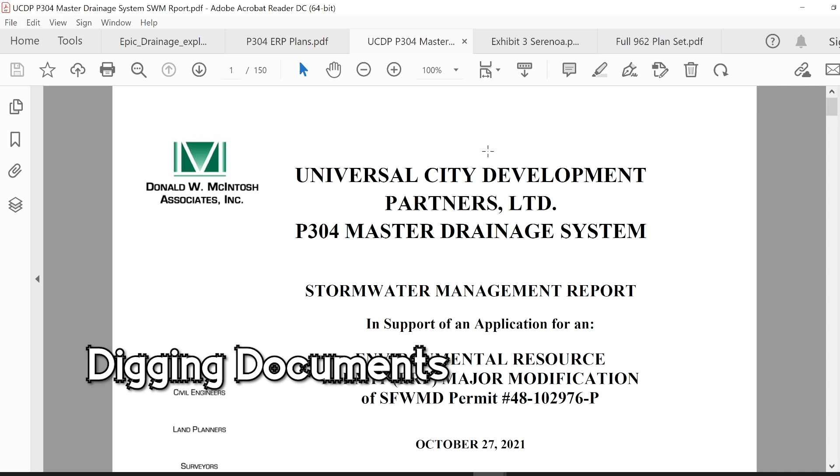My name's Tommy Hawkins and I'm about to talk you through the most exciting world of drainage. I know you're probably thinking it's pretty boring, but actually there's some pretty cool stuff we can find out from

the environmental resource permits. So here's the one for Universal, for Epic Universe. I'm going to show you the outline in a minute on Google Maps, but this talks about the impervious surface ratio of being 0.9 (90%). This is super important when it comes to how Universal have decided what's land and what's ponds and stuff like that. So essentially what it means is they're working on the assumption that they're going to build on their piece

of land 90% of the surface with something that can't soak water in at all - buildings, parking lot, pavement, any solid surfaces. But instead of trying to do it piecemeal, like tiny little bits here, tiny little bits there, they just work out the absolute maximum amount of area that they can build on and what's the absolute minimum amount of permeable surface they're allowed. And then they allocate that to the storage ponds. So they just work to their absolute maximum.

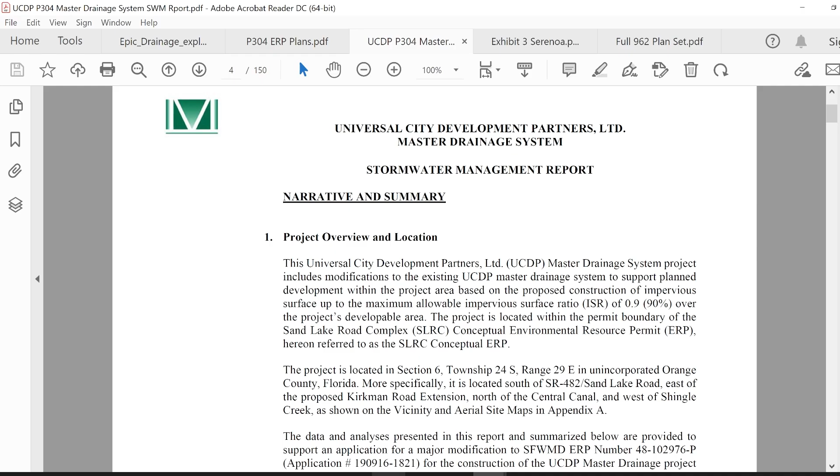So I'm going to show you on Google Maps - Google Earth, I should say - what that looks like. Here's the project site as they consider it. It's 522 acres on their worksheet. Now, as I said, they can build up to 90% of this land. So let's have a quick look what 52 acres of non-impervious surface looks like, i.e. ponds. So quite a big piece of area.

But then when we look at our Google Earth image, you can see that these ponds are spread out throughout the whole site. And there's ponds going to be in places where you wouldn't necessarily think that they need to put one. So I'll go over that.

There is one further pond that you'll see on a lot of these drawings. I'm just going to show you it here. This L-shaped pond, this is the FDOT pond, the Florida Department of Transportation. For a long time I was wondering what on earth this pond was doing there. It was just sitting there. It wasn't part of the plot.

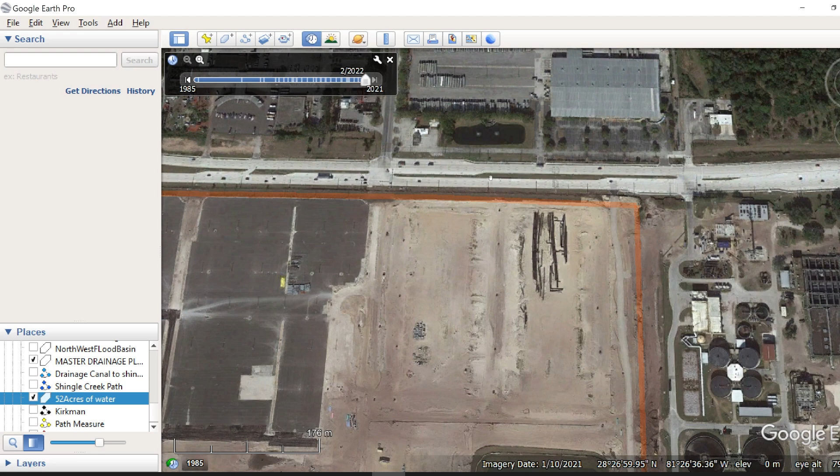It turns out that this is Sand Lake Road running along the top here, east-west. It's actually the drainage pond for that. So if they get any crazy amounts of water, there's obviously an underground pipe. It drains straight into this L shape just here.

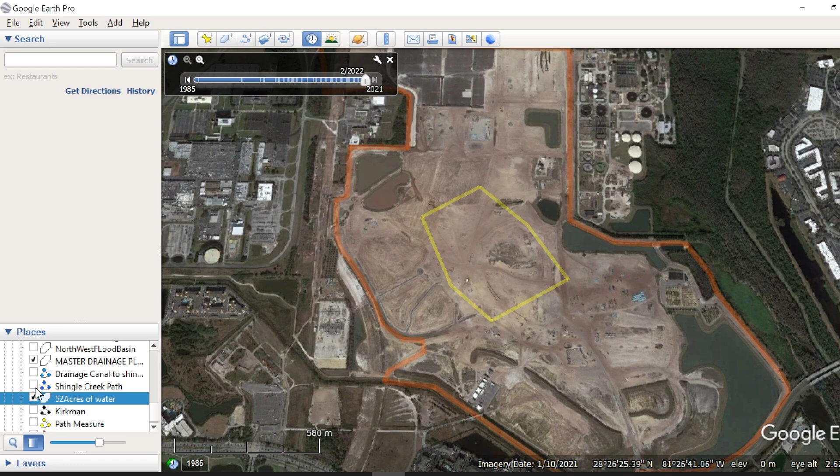There's a couple of main drainage basins that are in the area, or there's a few down here, which I'll get into later on the drawings. The two massive ones are the Southeast Basin, this huge one here. It's got its funny little cutout bit there. Goes all the way down, and then you can kind of see the two other areas that I'm going to talk about in a moment in this little section here, but I'll come back to them later.

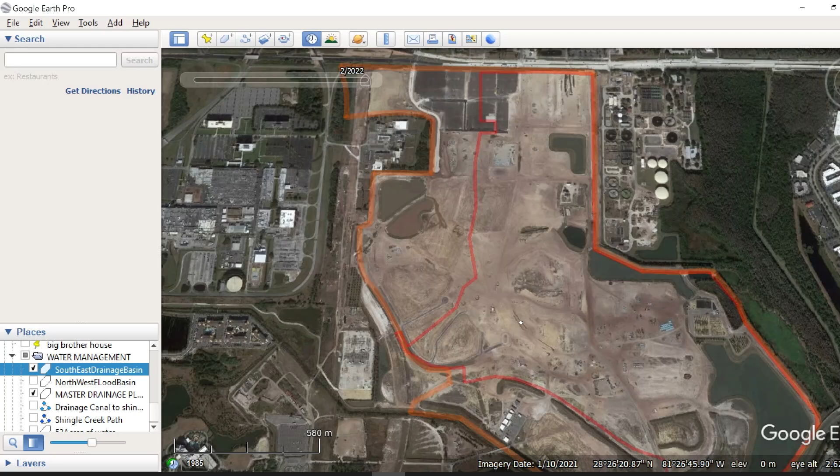And then we've also got the Northwest Basin, which obviously covers back of house, it covers monsters, it covers weirdly half of Potter and the hotel. So that's got its own little area there, and all of that stuff will drain into this massive one here, which is Lake 4. So let's have another look at the document, see if there's anything else to talk about.

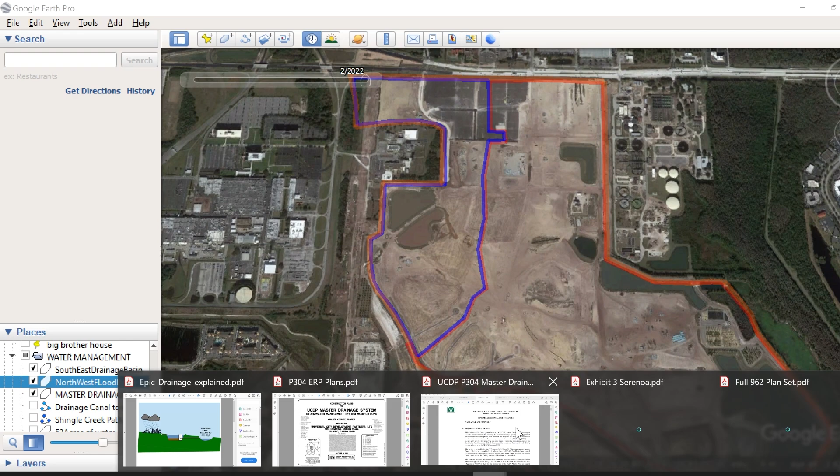Okay, this is important. The design criteria. The proposed stormwater management system must limit the post-development peak discharge rates into the Central Canal and Wetland Creation Area 1 to those established in the SLRC Conceptual Environmental Resource Permit for the 25-year, 24-hour design storm event.

Essentially, if they get a 25-year storm, and I'll tell you now that a 25-year storm means that they're getting, in a 24-hour period, 8.6 inches of rain. So that's a lot of rain. Their design that they've built must slow down that water going into the Central Canal.

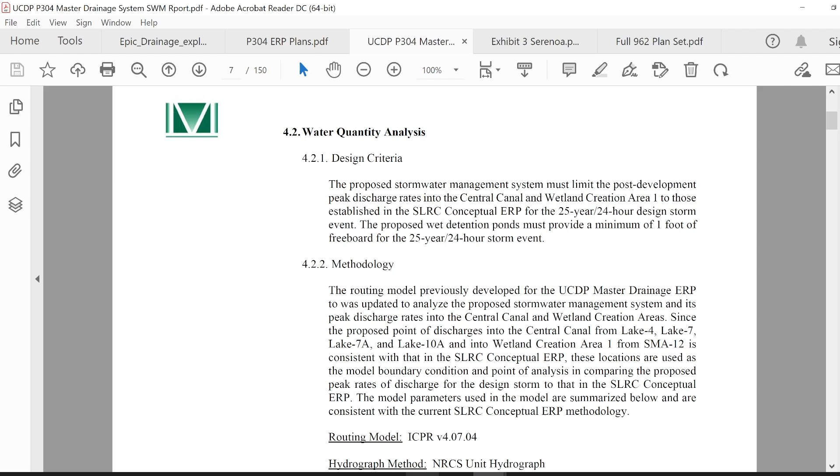So let me show you what we talk about when we talk about the Central Canal. So first of all, here's Shingle Creek.

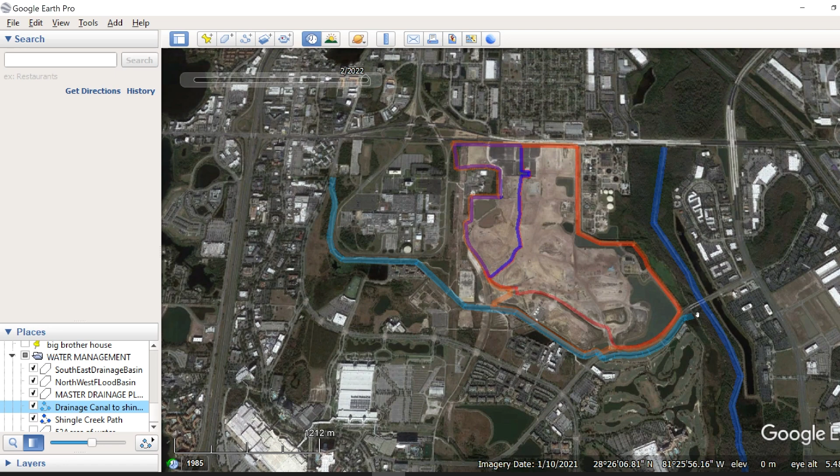That's the main waterway where all the water drains to. If I zoom out a little bit more, we can see this Central Canal. So all of these areas here are going to feed into this central canal and drain into it, and this gets to here.

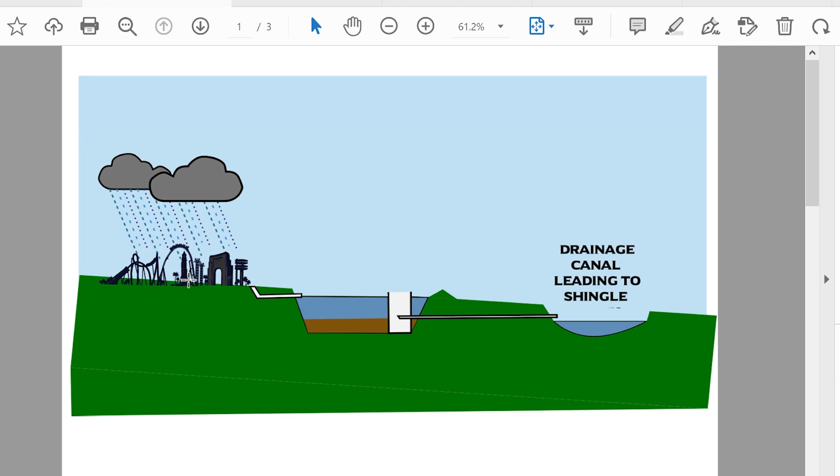So here's the basic concept. It rains on the theme park, the water drains off all the buildings and roofs, drains on all the pathways, and goes into one of our retention ponds. By virtue of all the heavy stuff sinking to the bottom, the sediment settles, and they've got an overflow like you'd have in your sink at home. When the water gets to a certain level, it overflows into this. There are skimmers and traps on top, so relatively clean water goes in, and then it drains out into the drainage canal.

So you're probably thinking, okay, there's not much increase between the design height of what it can take in terms of water and the regular water height. But obviously these lakes are pretty big, several acres, and we'll start seeing in these calculations a measurement of water volume in acre-feet, which is 1 acre of land at 1 foot deep. So there's obviously considerable volumes of water there.

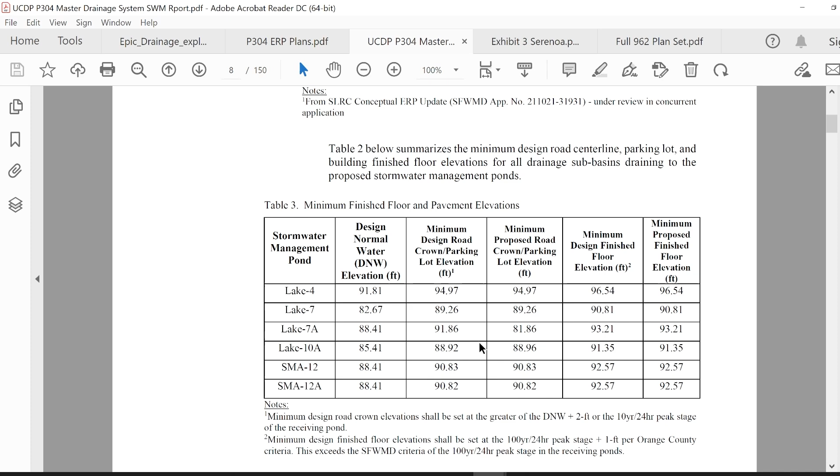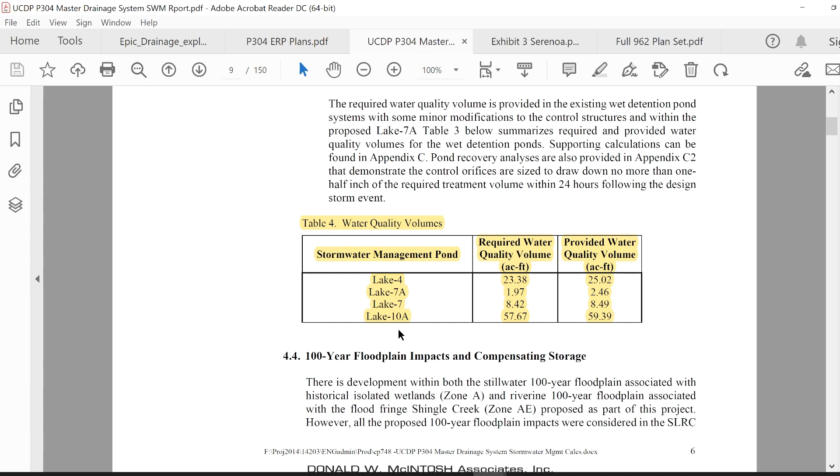As I just discussed, the required water volume they need is 23 acre-feet, and they're providing 25 in their design. One acre-foot is 1.2 million litres of water - that's quite a bit, you can see there's quite a bit there. 10A, the biggest one, has got capacity for 59 acre-feet, so serious amounts of water there.

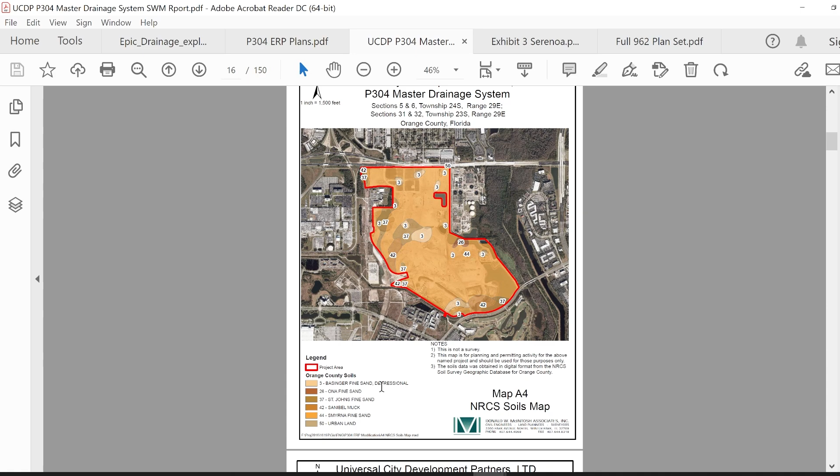This one's for all those sand geeks out there. Here's your different areas with your different grades and types of sand and muck and dirt.

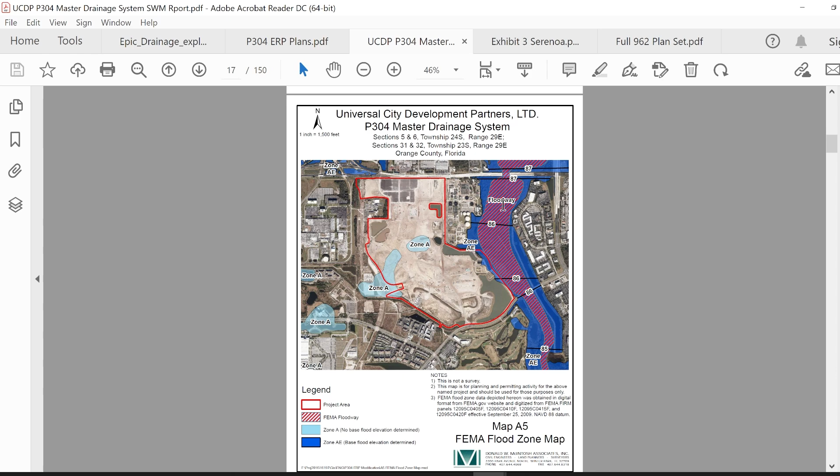This is the FEMA floodway. So if there was a major flood, it would flood out of Shingle Creek and creep into part of the Epic site, but it wouldn't actually affect any of this. So even though Universal owns all this land up here, they're not going to build anything on it. And here's our drainage basins, we'll go into this in more detail.

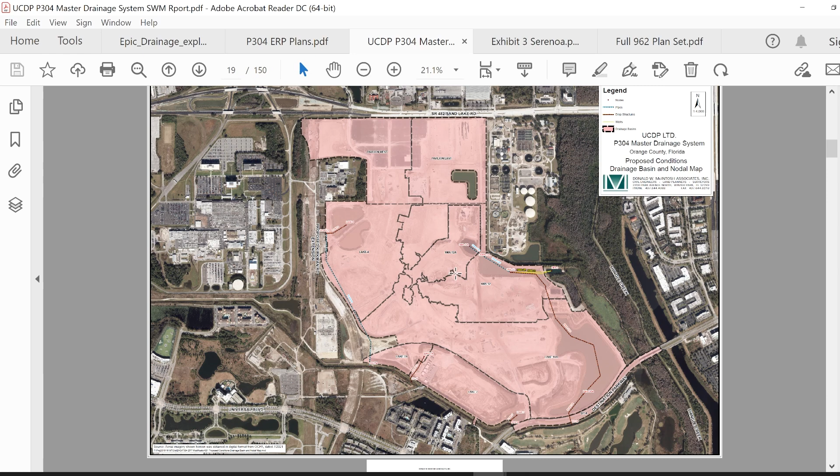You can see the pipeway that takes the water to the canal, and you can see these different areas. So let's have a quick zoom into one of these areas.

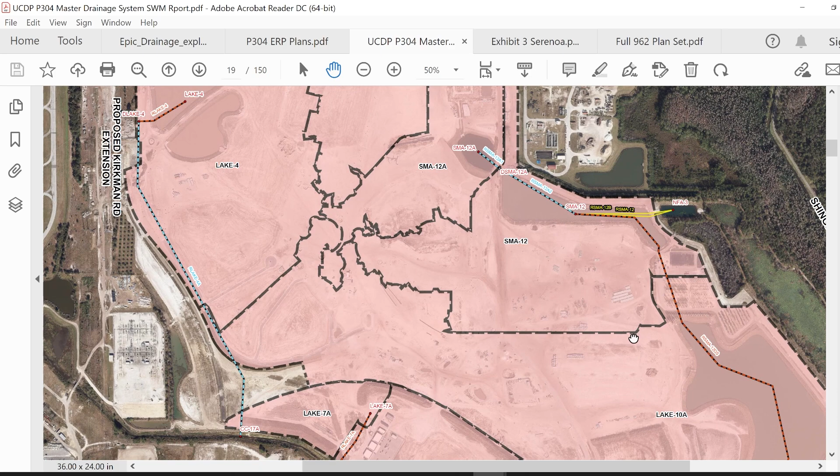Even though we've talked about how it's split into two major parts, we've got these little subsections that are going to drain into the various areas eventually. So it seems this area will drain into SMA-12A, this area will tend to drain into SMA-12, and the larger area will drain into 10A. I'll discuss this further in a moment, but you can see these lakes are connected.

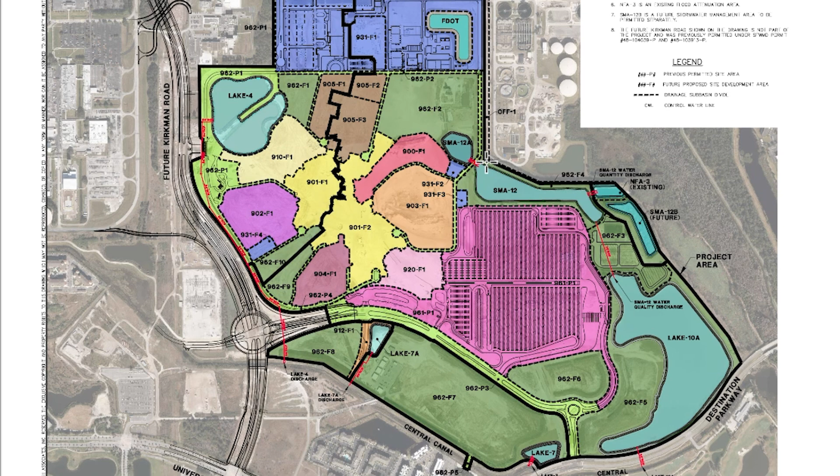So let's go back to our drainage explanation. One theory I believe may be that they are slowing the water down through a series of different lakes, not just one. We can see on this big map that these lakes are all connected. It could be that by having successive drains with those drainage overflow filters, they'll not only clean the water as they go, but significantly slow it down if there was some sort of storm.

Here's the big mega map, we've seen this one before - it's Alicia's favourite, and honestly one of my favourites too. So we've got our different areas, we've talked about this one and this one. Let's look at Lake 4 as an example - we can see all of that area drains into Lake 4.

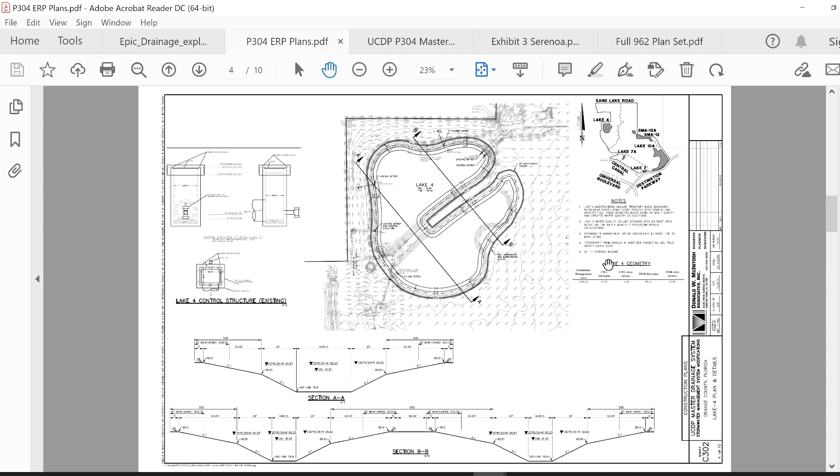If we look at a cutaway of what the lake looks like, we can see that here. Let's zoom in - here's our overflow system that I was talking about. You've got a grate on top, the skimmer, and then the water flows in and drains out. The elevation at the bottom of the skimming level is 93. We'll look at the control level in a moment, but it's got to rise 1.5 feet before it goes over.

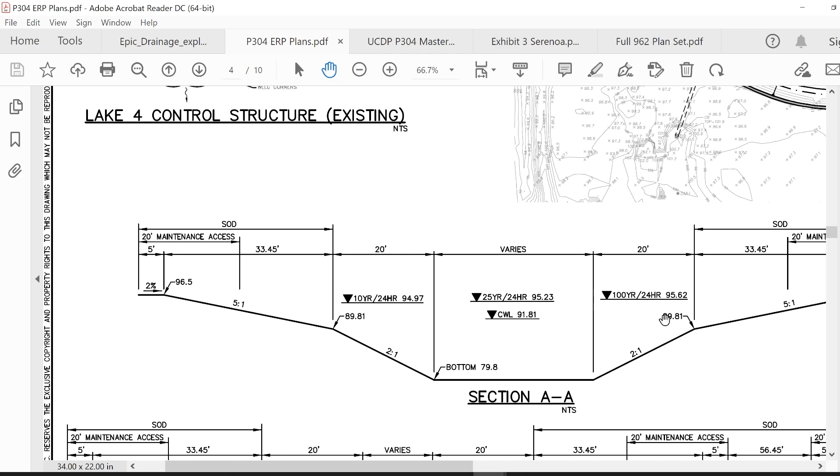The control water level is 91 feet. The 25-year storm is 95, the 10-year storm is 94, and the 100-year storm is 95.62 feet. Most of the time, the water level is going to stay well below the top of the overflow.

So we've got this permit that zooms in really close. A couple of things I want to show you. Here's our outward drain, there's two here. Here's the one we were just looking at. Want to see something interesting?

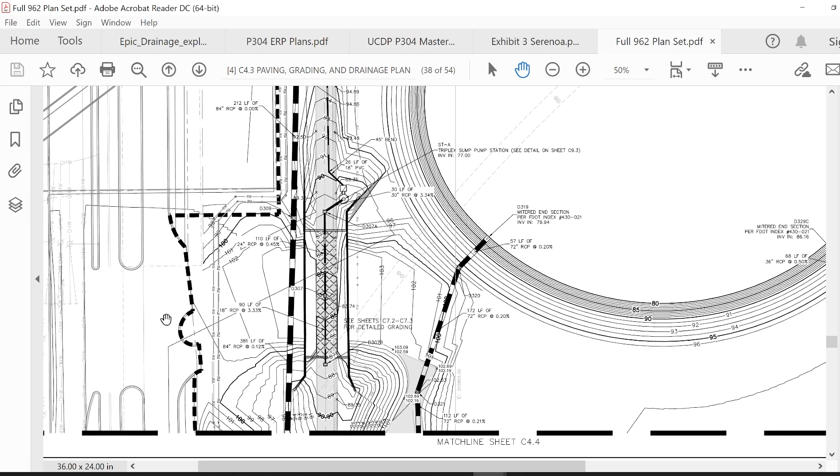Look here, here's our ring road around the site. This is a tunnel. So what that means is the TMs and whoever's using the road can go about their daily business, and the people coming to the hotel through this way won't be affected. They never shall the two mix.

Go back to the rest of it. Okay, so we've got these little ones here. So this one's got its own pond, Lake 7A. We don't currently know what they're doing with this land. However, that's about 12 acres of land there.

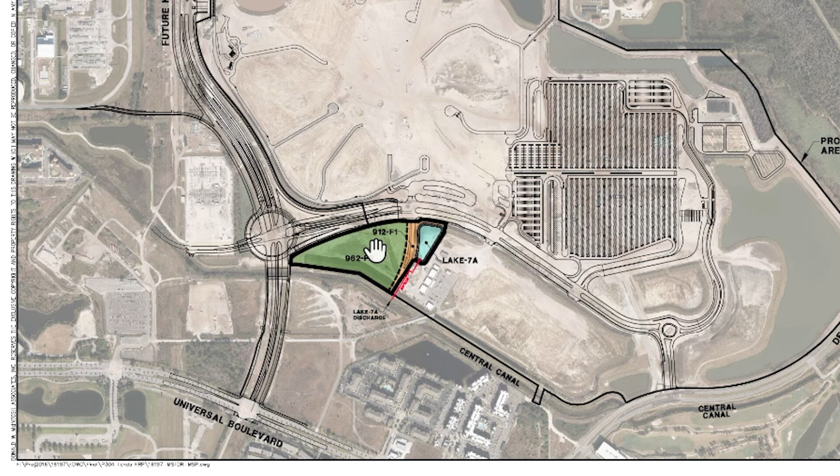So my guess would be that they could put a nice hotel on the corner. I certainly would, but we'll see. We're going to talk about these two plots of land where we've got hotels in a bit. But that's got its own little lake, its own little mini drainage basin there. And again, it's got its own little system with its own little overflow.

This one here, again, we're not sure whether this will be hotel or whether this will be some sort of CityWalk 2.0. You can see here, there's another map and drainage plan that I'll have to try and find, that they're actually building a road on this little section to get across the drainage canal into this plot of land this way.

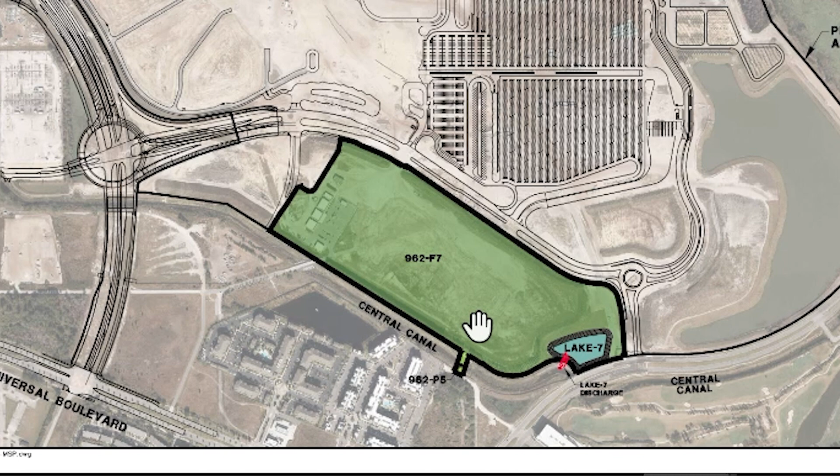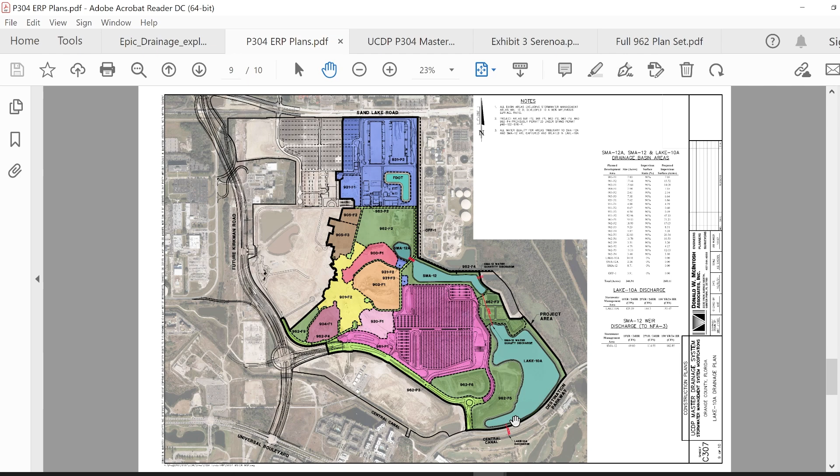That's got its own little lake, little drainage, the same as all the others. Here's our mega one, and we've talked about this, SMA-12, Lake 10A, SMA-12A, and that all drains through and eventually comes out into the drainage canal. So as I said to you, let's look at this a bit more closely.

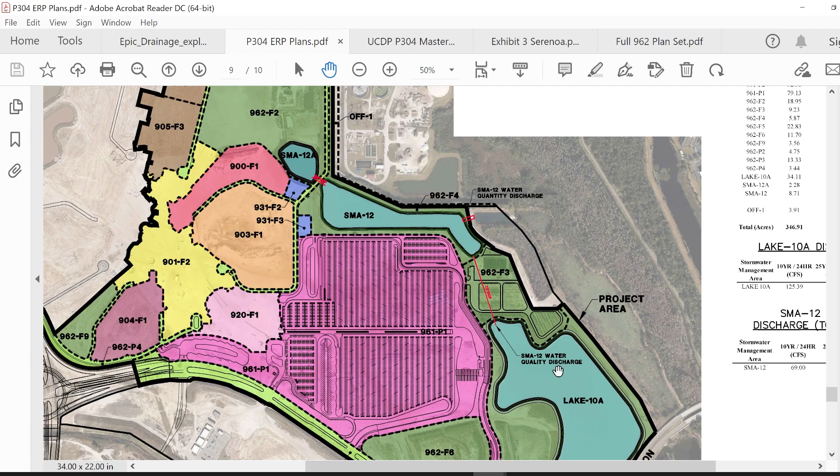They're all connected. Does that mean that one drains to the other, to the other, to the other? I'm not sure, I'd have to probably look at the water levels on each of them. Is one higher than the other, or are they all the same? Is it just a way of moving water around? I'm not too sure. If you know the answer, leave a comment.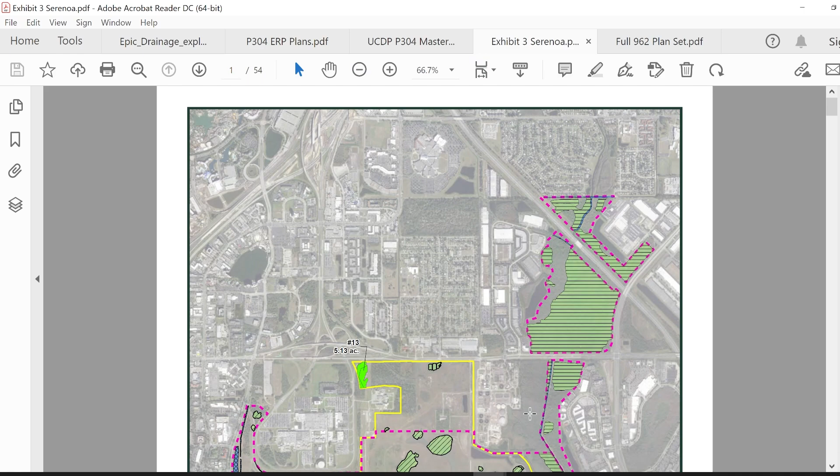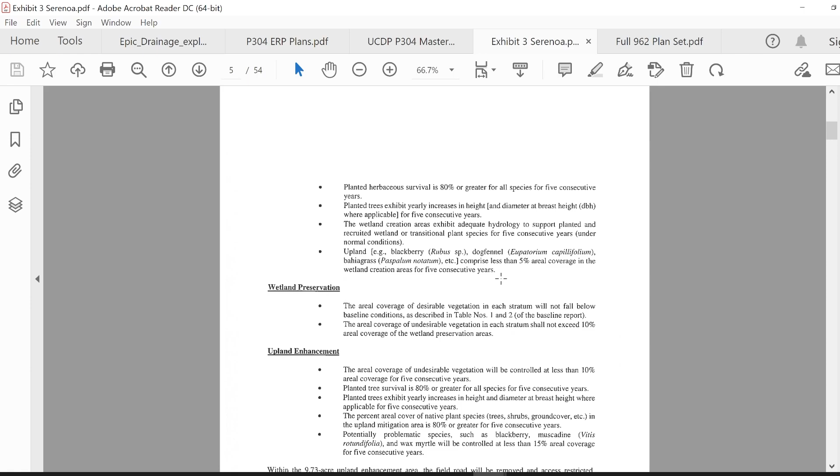One thing I just wanted to show you all is what they're doing with the wetland area. Again, this is all area that they own. It talks about mass grading, so they own all this land, but in this document we've got talk about vegetation and some of their plans for the wetland area.

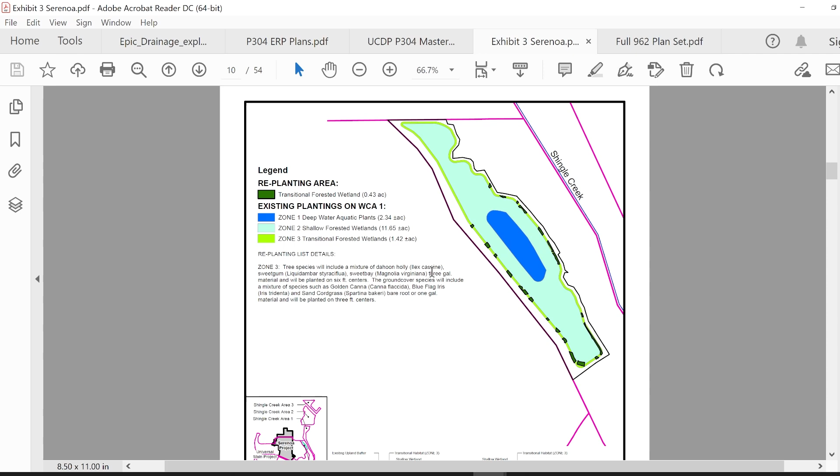Okay, here's one of them, wetland creation area, deep water aquatic plants, shallow forested wetlands. So that transition from dry to water type of plants, and you can see a little cross section that they've shown an example of what they want to do with that area.

And then there's another one here, a similar kind of thing. So they've got a plan for everything. They've literally got a plan for everything that they want to do.

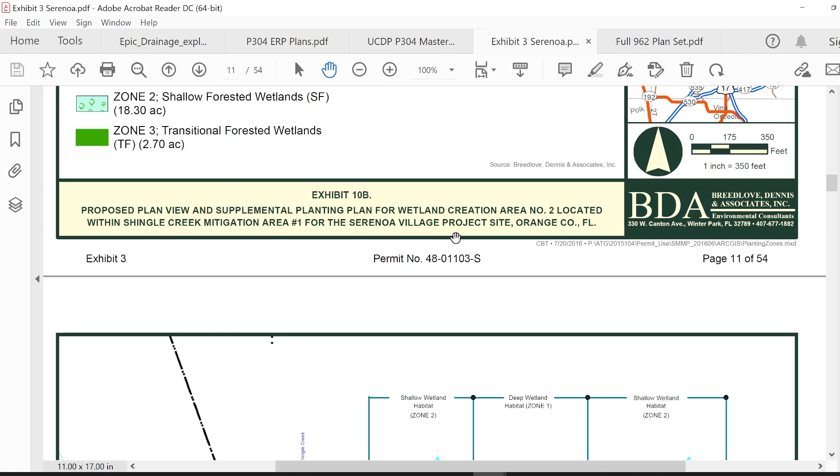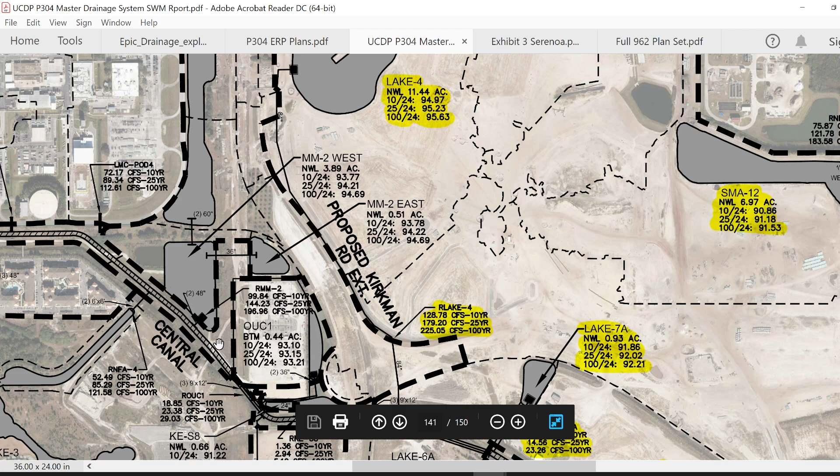Okay, so this is the final plan that I wanted to show everyone. Lots of different ponds around here. Some of these have been shown up in bioreconstructs photographs.

Again, what I was talking about earlier, this little corner of land here, they're going to build a road that comes from Destination Parkway. They're going to build a little roundabout. Universal don't own this land, but obviously it's a mutually beneficial arrangement where these guys give up some of their land. Universal builds a road and a roundabout intersection.

They get to then have access to their site, and the businesses that pop up here have got free access into their lots. So it works out well for everybody.

And then if we look at this, this is my most exciting, interesting part. We can see that these 2 plots of land that we know have been allocated for hotels have their own little plots of water retention. But here's the thing, these 2 plots of water here go here. This is the road that you're going to go up into. This is the start of Kirkman and then into Resort Road.

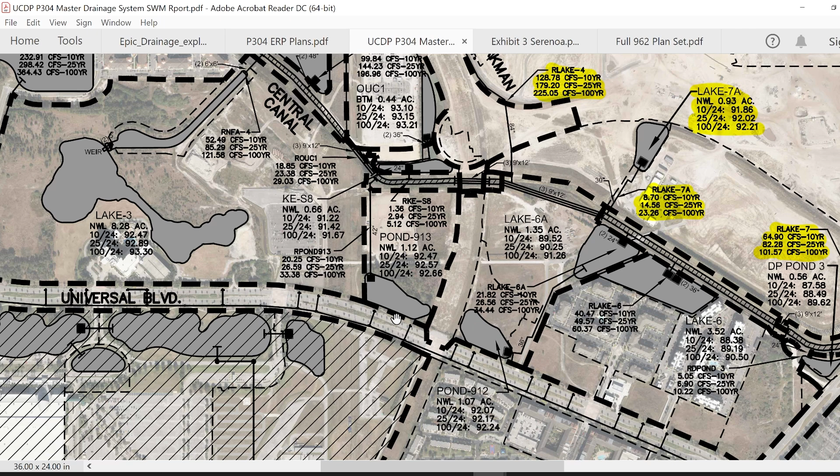Are we going to get hotels that are symmetrical, and are they going to go here? Because we know that there's going to be a pond here and here. We know there's going to be a pond here. So that means the hotel has to somehow fit into this. So I'll leave that to your imagination. What do you think is going to go there?